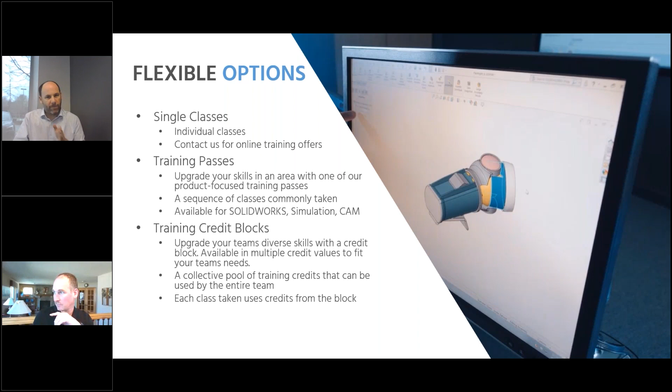So there are flexible options for getting trained. And this is relevant to a question that Dan has asked: what about certifications? Yeah Dan, we're going to get your question answered here. If you want to stand out amongst SOLIDWORKS users, show your peers that you really know what you're doing, and not just tell them but actually give them something to show, check out the certification program from SOLIDWORKS. Here's a link.

Again, you don't have to write that down, it's available in the handout. But in terms of how to take certification exams, it starts by going to that link. It has a number of different jumping off points to things like the certification catalog, FAQs, and so on.

My general philosophy for taking these certs, and I've taken quite a few of them over the years, is to study, train, and study. So I like to start off with some of the built-in tutorials. In fact, some of the certification questions deal exactly with the concepts from the tutorials, and Glenn's going to show you those in a bit.

Then I like formal training, and I like to do a little self-study before I get to the formal training, so I really know what I'm doing. And then there's a number of sample certification exams I'll point you to in a moment that can let you actually preview the types of questions you'll see on that certification test.

In order to take the test, you'll need an internet connection. You'll install a little lightweight application that proctors the exam, so it times you, gives you the questions, records your answer, and gives you the final score at the end. You'll also need your PC running SOLIDWORKS, and the version depends on the certification test you're taking.

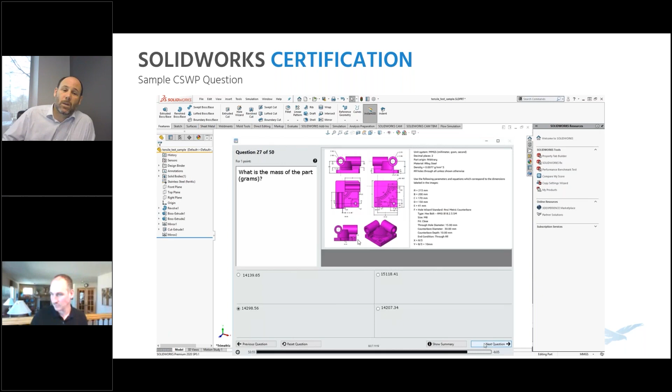Awesome, very cool. All right, we're getting to the end here. I'd say the last area I consider, if you have a little time on your hands and want to, when you return to in-person work and get back to normal, whatever that ends up being, want to go back with more skills than you had. So we'd really encourage you in this time to explore the software, and that starts with SOLIDWORKS. There's so many automation and efficiency adding tools built into the software that I forget about all the time. It's really worth using this time to dig into those and see if there's a way to improve your processes. All of us, when we're busy, get so locked into the way we do things without even questioning if there's a better way.

Some ideas we had for ways to do that are design tables, global variables and equations, and master modeling techniques, leveraging the API to automate common tasks, getting into surfacing. It's definitely one on my list, I'm terrible at it but wish I was better. And maybe looking at costing to figure out how to push information model down through your value stream. So where do you look for these things?

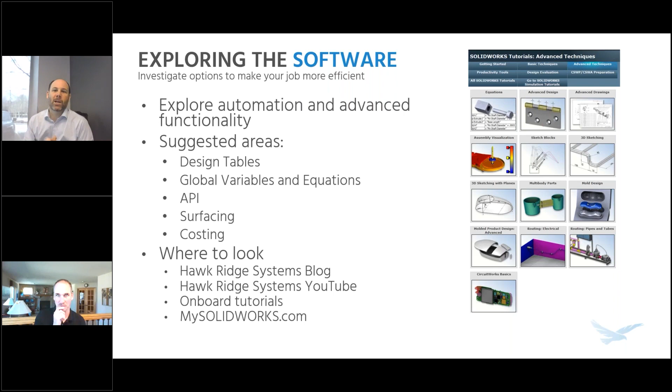Also look right under that, CSWP and CSWA preparation classes built into the software to help you pass those certifications. And then lastly, under help, you'll find these tutorials. But if you want tutorials beyond just SOLIDWORKS stuff, you may need to turn those add-ins on, which is a little tricky. If you go to add-ins and turn on CAM, for example, you'll find a CAM tutorials area under that help menu.

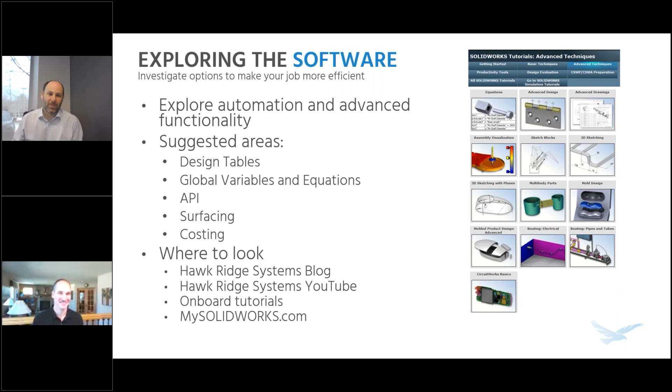Last one here, mysolidworks.com. Ton of great content up there as well, hosted by SOLIDWORKS. But that's just SOLIDWORKS, there's so many tools and modules and other technologies in 3D design today. When I started, we sold SOLIDWORKS, PDM, and stress analysis, and that was it. Now the portfolio you oversee is huge, there's things on here I don't even know what they do.

But I'd really encourage you, if you have some downtime, have a look at what's out there, both from us at Hawk Ridge Systems and elsewhere in the market. Have a look around, see if there's anything that can make your processes more efficient or plug a hole in your workflow.

In the last time when most business was slow, back in 2009, we worked with a ton of customers just to explore their workflows and talk about some things they might be able to plug in once they got back to full productivity. Using that downtime to explore things you can't do when you're busy is a really good idea.

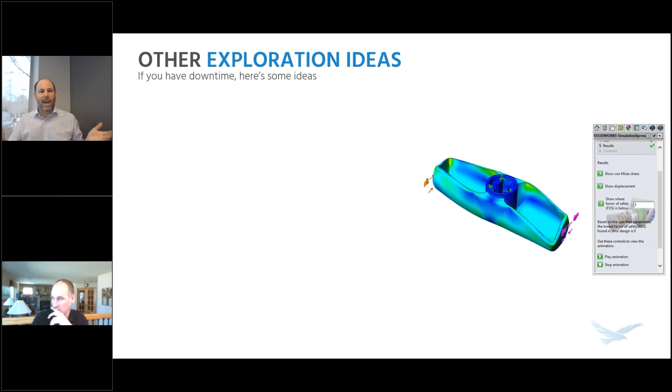So again, how do you do it? What do you look at? A really easy way is the Xpress tools into SOLIDWORKS. They're in the tools menu, Tools, Xpress Tools. You'll find simulation, flow simulation, DriveWorks, design for manufacture, and maybe some others. Those are functional, introductory versions of the full product suite. So I can run a stress analysis on a part, I can do a really basic CFD investigation. There's a few different things you can do in that, and it's a click away. So go check those out.

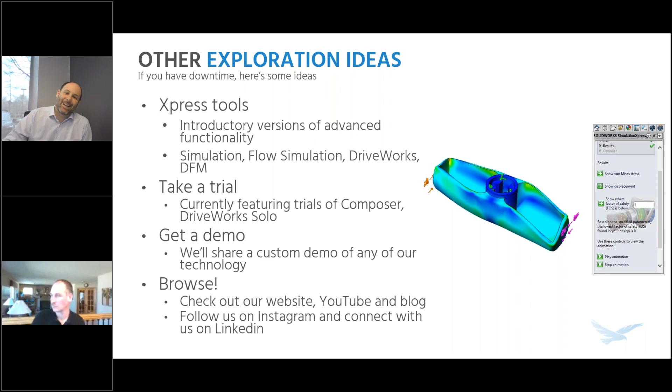One area that is worth discussing, though, and we've intentionally left this to the end, I apologize, we're going to run a couple of minutes over, is the 3D experience. The 3D experience is kind of the next evolution of the SOLIDWORKS marketplace, but it's really in its infancy. We don't really want to present it now as a bulletproof solution for everyone, because it's not, right? But as we reflect on this time in our history, if I look at the business systems that I have that I'm not having any issues with, like my Google Mail, my Google Docs and Sheets, and the drive that I store those in.

Our customer resource management, relationship management tool, they're all on cloud and they've just worked. I've just logged in and they've worked. And the 3D experience is an environment that, in the future, could give me that sort of insurance policy that I can lose everything, but if I can maintain a connection to the internet, I've got my stuff. I can use my resources.

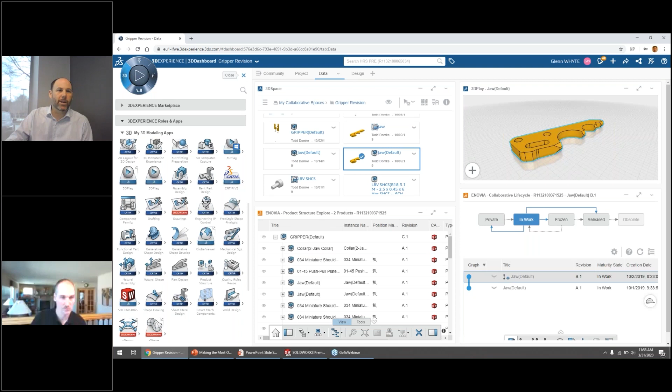So just to show you a 30-second overview of what this might look like. This is an active project that I have running in the 3D experience. And it kind of starts with social collaboration. This is a series of conversations my coworkers and I are having about a project we're working on.

I can put pictures, I can put files into this environment, and I can talk about different topics and create comment threads associated with individual things. So everything we're talking about for this project is in one place. It's kind of like my Slack, my Google Chat, associated with this project. Right? Yeah, absolutely.

The data, the files I'm working with are all stored in here as well. So what we're looking at top left is, I'll use the word folder - it's more of a database, so folder is the wrong word, but these are all the components. These are native SOLIDWORKS components.

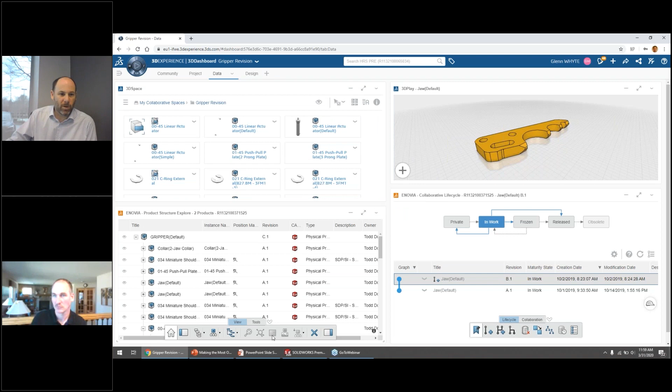I can explore at the bottom left here what my product structure looks like. I'll make that bigger because it's easier. I can browse around the structure. This one's pretty flat, so it's not very interesting, but I can see the relationships between the individual components.

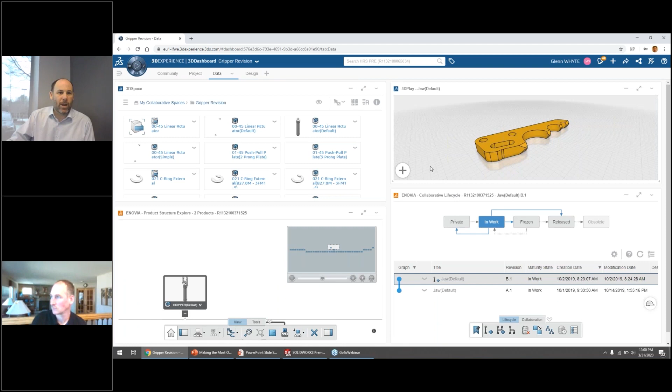I can drag things into a view, see what they look like in 3D without needing any sort of CAD application. This is just a website.

And then there's basic lifecycle controls, so things that are in work and owned by me, other people can't mess with. It's just exercising some basic kind of control over things.

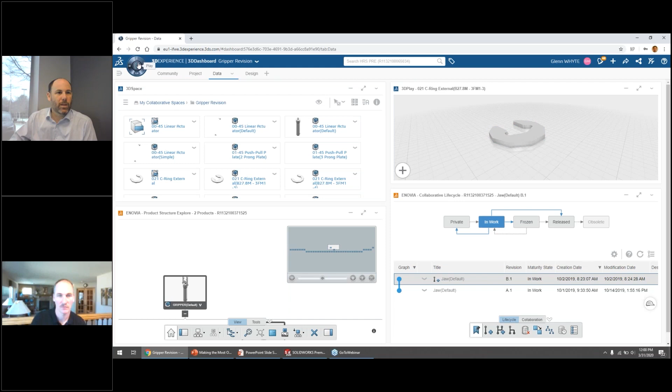There's also project elements available, and you can grab sort of my project planner environment where I can lay out tasks and things like this. It's kind of something we can consider for the future, and hopefully the next time there's a global event like this, we may have more stuff available in the cloud.

I've got my tasks assigned to different people, I've got my Gantt chart for how the project's going to proceed, it's all kind of lined up here. And then these tools do maintain a direct connection to conventional SOLIDWORKS.

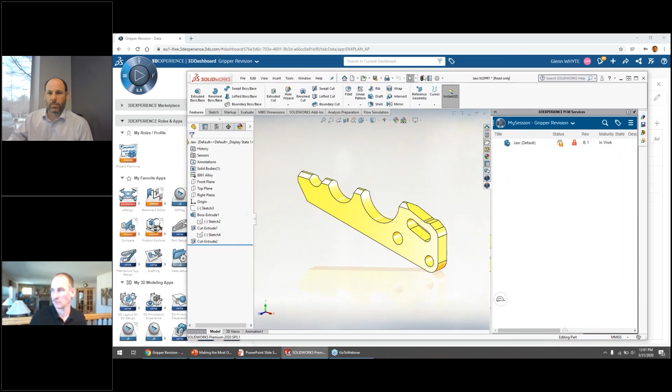So here's my conventional SOLIDWORKS. There's a part that I opened right from that environment. And this kind of points to Robbie's question that he mentioned. This is basically the state of those components. And this particular one is locked by my colleague.

I can't touch it. He can release it and then I'll get access to it. But right now it's reserved by one of my colleagues. So within an assembly, we can kind of control what each individual is addressing or working on.

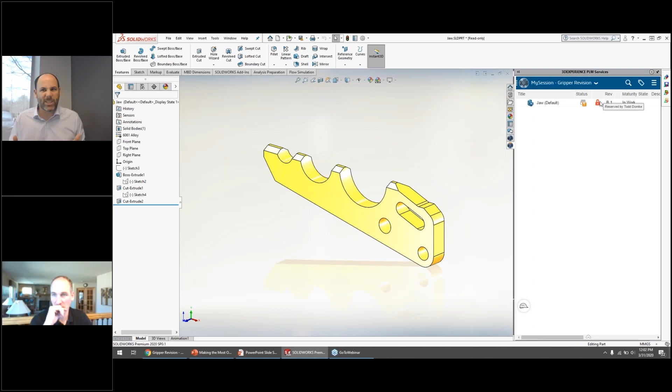So we present that as just a bit of a taste, a bit of a preview of what this 3DEXPERIENCE environment that you probably heard a lot about but don't really understand, what it's kind of geared towards. And today there are, for SOLIDWORKS users, really just 5 basic tools available.

A couple of CAD tools that will run in the browser. The industrial design one's pretty interesting because it will do things that SOLIDWORKS can't, around subdivision modeling. Some basic data management tools, a project management tool, and then a really powerful nonlinear analysis tool.